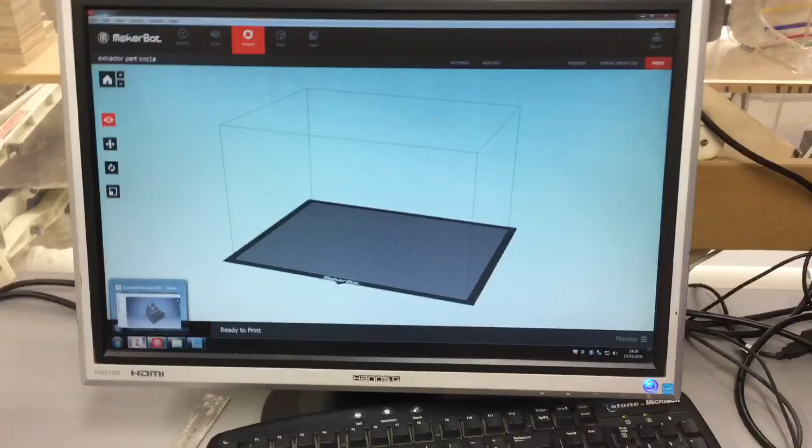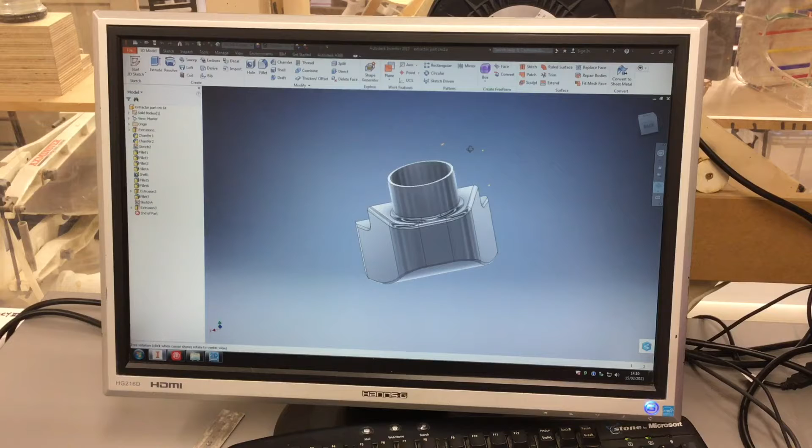I'm just finally checking that I'm happy with my design before I export it. Then the next step, I'm going to go to File, down to Export, and click on CAD Format.

I want to go across and find the drop-down arrow, and I want to make sure that my file is in an STL or stereolithography format.

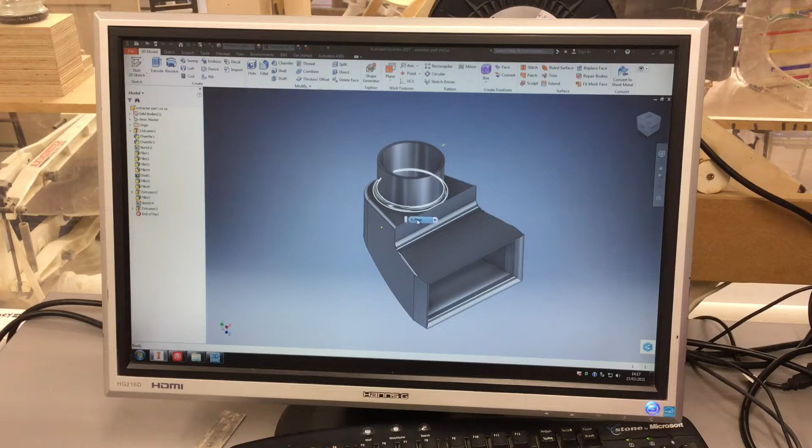Once I've exported my file, I can open up the MakerBot software and import that. Simply click on File and Add, and then find your file where it's been saved.

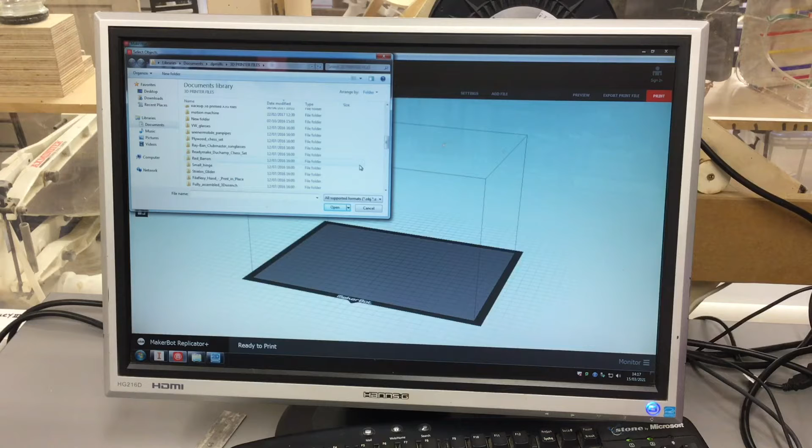You will notice that when you first open your file it looks quite small, and it's a bit of a quirk of the program that it tends to be changed to 1/10 of the size.

This is easily remedied by changing the size of the file to 1000%. Then if you click on Enter, it will become the same size that you drew it at.

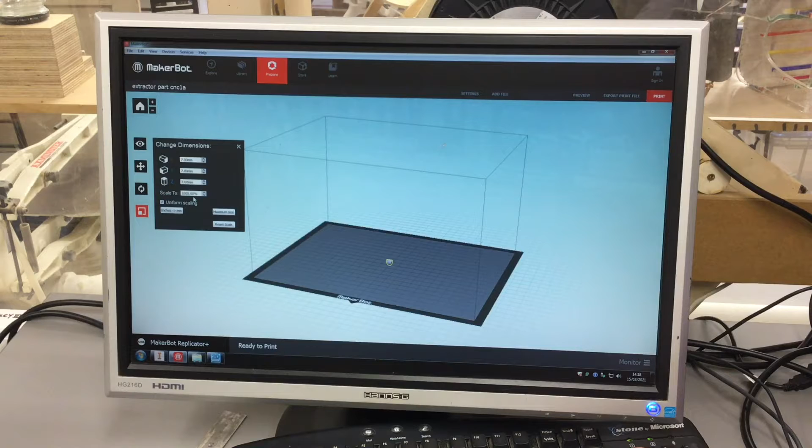Again, depending on which plane you drew your design in, it may come into the MakerWare software and need to be reoriented.

And you can play around with this until you're happy with it. Then lay it flat onto the bed.

If it needs moving, you can click on this and change the position of the design on the bed, or recenter.

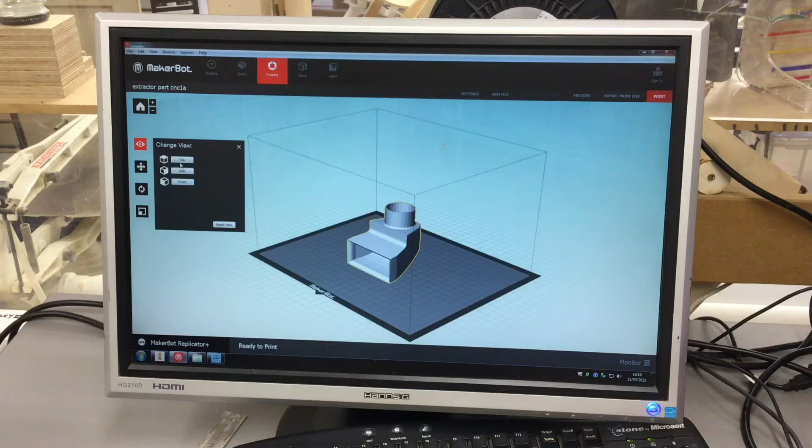And then finally, just have a quick check to make sure you're happy. You can do this by simply clicking and dragging, or using the set buttons to look at the orthographic views.

Finally, click on the Home or the House button and you're ready to go. The next step is to check the settings.

This is going to print in standard quality, and I'm going to leave the raft and the supports checked. Obviously this is quite a complicated design, so I want as much help as I can with the printing process.

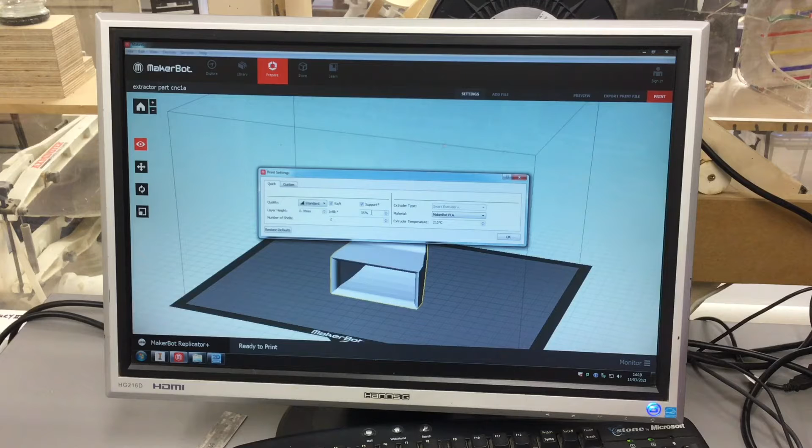The default is 10%. You'll notice here that I've got that at 35% because I wanted a little bit more intricate and strong. Finally, I'm going to send it to the printer.

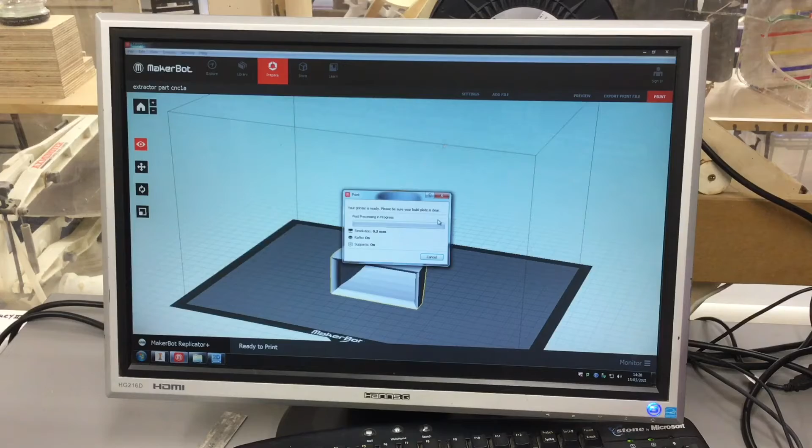While we've been exporting our file, the printer has been heating up, and we're waiting for it to get to about 215 degrees with PLA. We're not quite there yet.

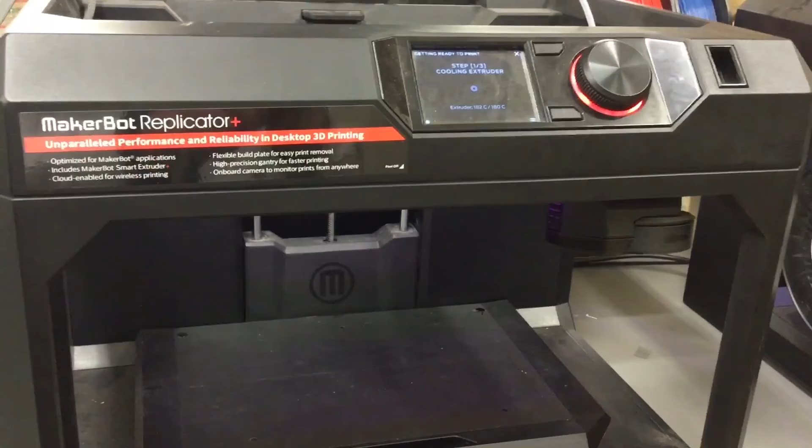Quick double check, won't be too long.

As soon as the printer is at the right temperature, it will start to cycle through the setup process, and then it will begin to print.

Usually most 3D printers lay down a line of PLA before they start printing, and because we've set our 3D printer to include a raft, it will do this first, and that will provide a strong foundation onto which the 3D print will be built.